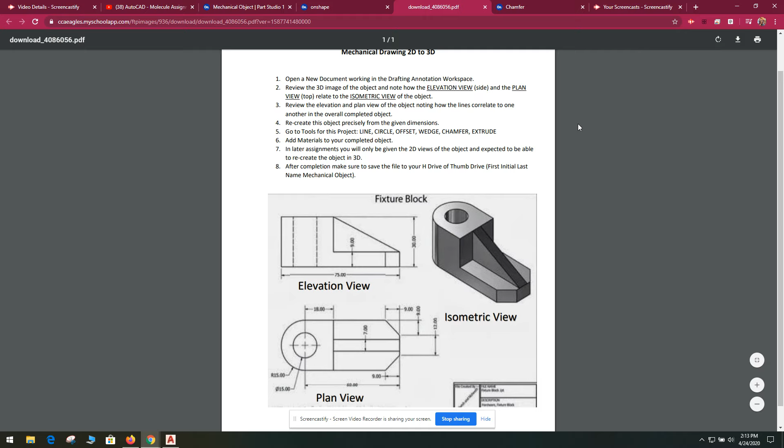Okay, in this video, I'm going to show you how to do this mechanical drawing in OnShape. It's a little different, you just have to change the way you function in this software, but you can still create it. So just take your time, and think through things.

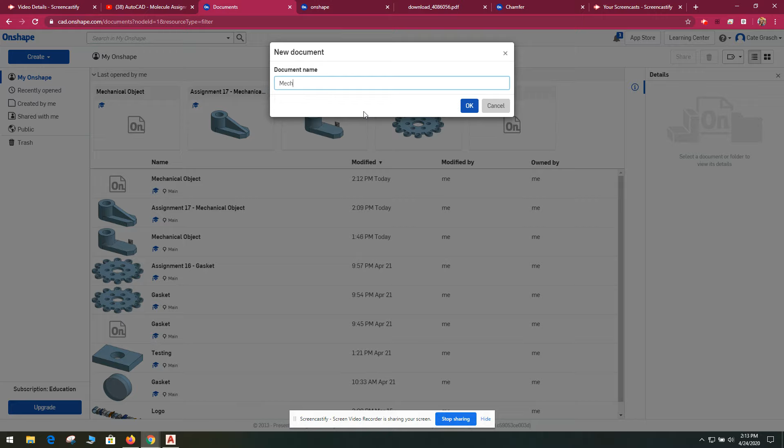So I'm going to go to OnShape and start a new document, just like we've done before. Create document, we're going to name it mechanical object, and yours is going to have your first and last name as well. You'll get the workspace screen.

You have all your planes visible. Go ahead and turn off your front and right plane to make it easy, and view it from the top using your view cube. Scroll back out because what they're giving you is pretty small, and we're going to want to start with our rectangular footprint. So sketch, select top, and now you can choose rectangle.

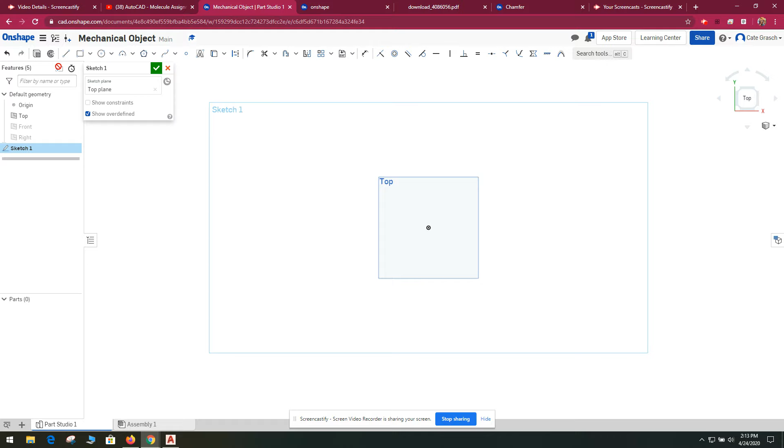Again, it doesn't matter the size you make it because you're going to come up here in dimension and change it. Once you've done that, you need this one to be 60, and it's going to be a lot bigger.

With this still selected, you're going to select this... select that and drag it out. That needs to be 30.

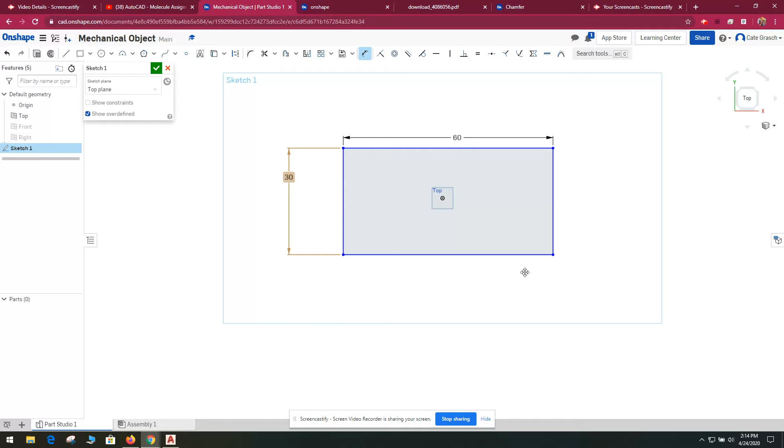Once you have this, we need to do our circles. You'll have one circle that you can go from this midpoint out and it should be 30. Then the next one, same midpoint, and you're going to have to actually dimension it because you don't have the option of snapping. So now you have your two circles.

You can go ahead and use your trim tool here to trim out these unnecessary points. So once you do that...

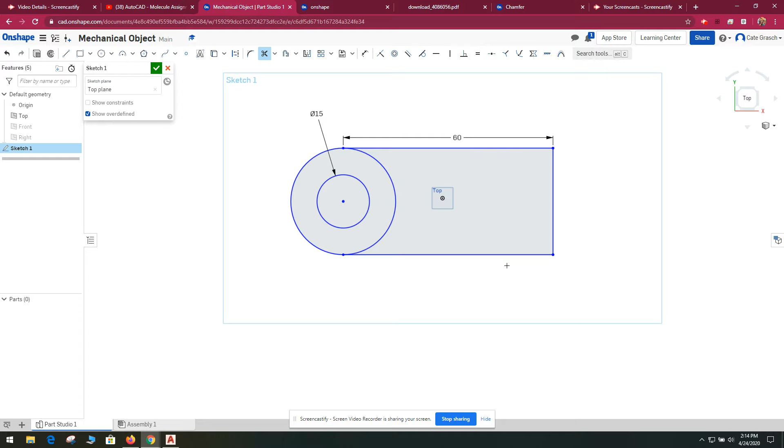You are going to do an extrude, but you only want to extrude... oh right, this is different. So let's only use one piece of it, and we won't do that because we're going to have to redraw it now. Yay.

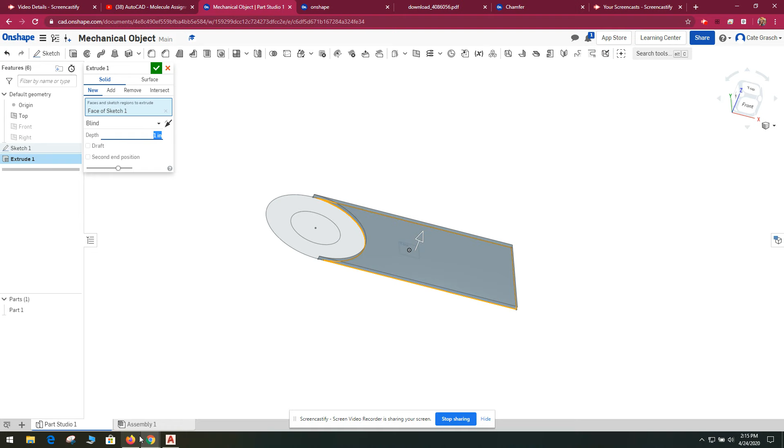We'll extrude these in pieces. This one needed to have a depth of 9. If you look at your drawing right here, this is your depth, you need it to be 9. Okay, whoops, not there. You're going to change it over here to 9.

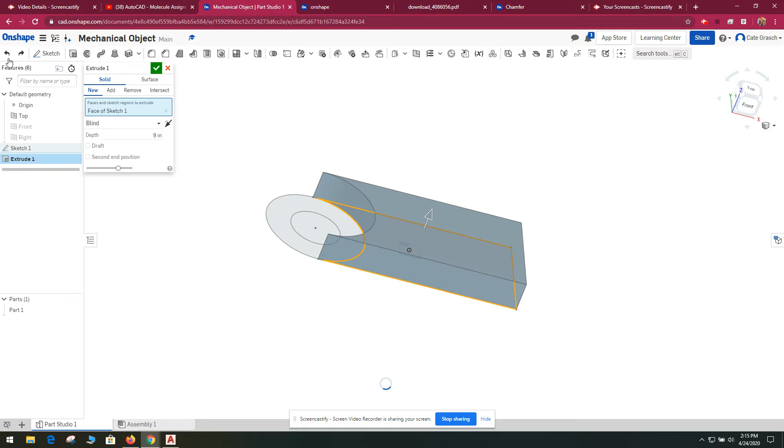So then we want to extrude that, but we don't want them to combine, and that's a problem that I've seen with OnShape compared to what we've done before. So we're going to step back, and we're going to say good to go.

So we're going to do a secondary sketch. Now the plane, you have to pick it. You want it on this plane, the top plane again. And we're going to do our circles.

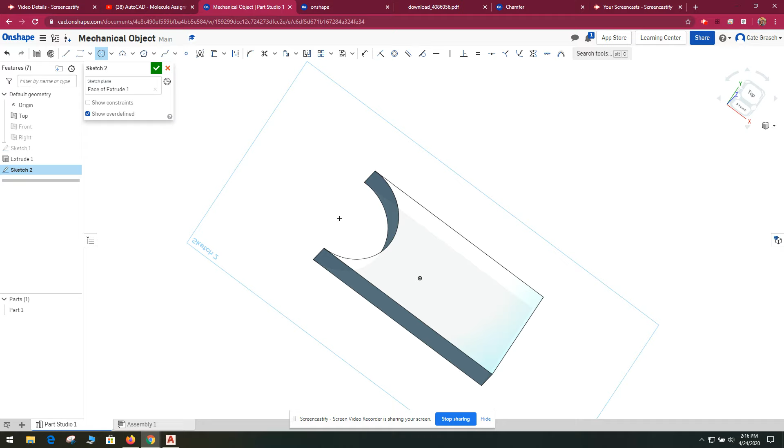So I made a mistake of doing my circles first, but you should still be able to get that midpoint. It didn't do what I wanted it to do, but that's okay because we're going to force it to do what we want it to do. This is going to be 30.

We're going to do a secondary circle, and it's going to be as big as we need it to be, and then we're going to dictate what it's going to be, which is going to be 15.

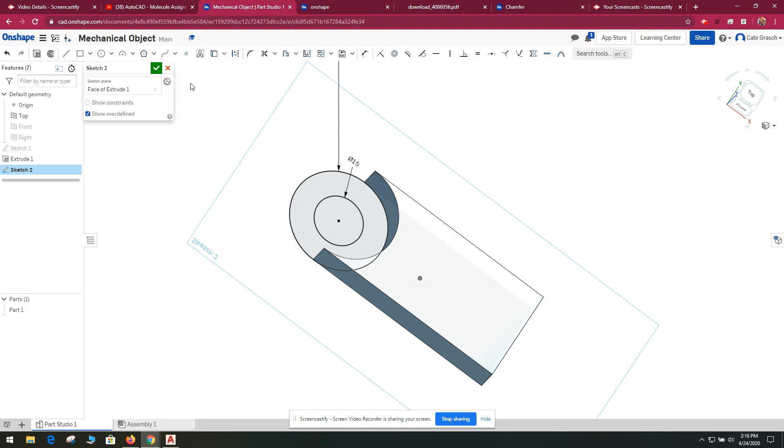Then you'll extrude this as a separate entity. Whoops, we want it to go up, so we want to change the arrow to up, and change the height. If you look back on your diagram, you want it to be 30. So you come back to Onshape, and over here in this menu box, press 30, and it should go up to 30.

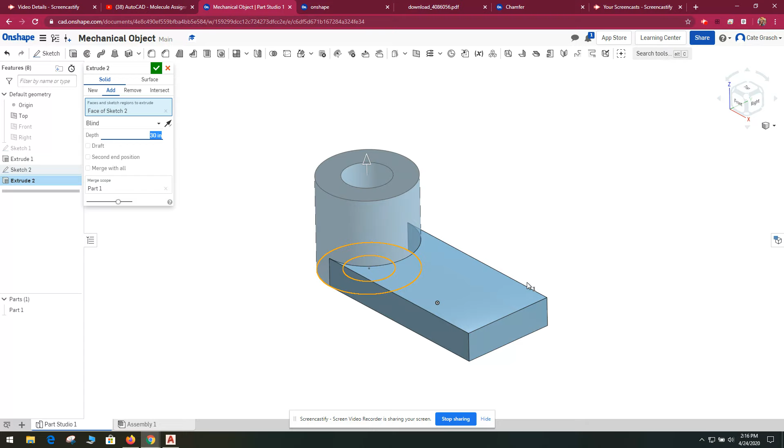At this stage, you should have a circle and this rectangle. So if we go back to sketch extrude, okay, what happened to... okay, if I go to this one, I want to...

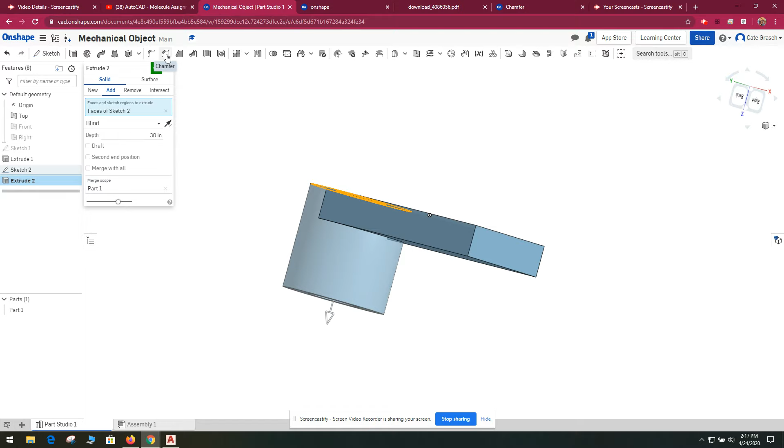I want to do a chamfer. Their chamfer tool will come up here, and it'll ask for the edge automatically. So we're going to click this edge. It automatically wants equidistant, so we're just going to type in 9 and enter.

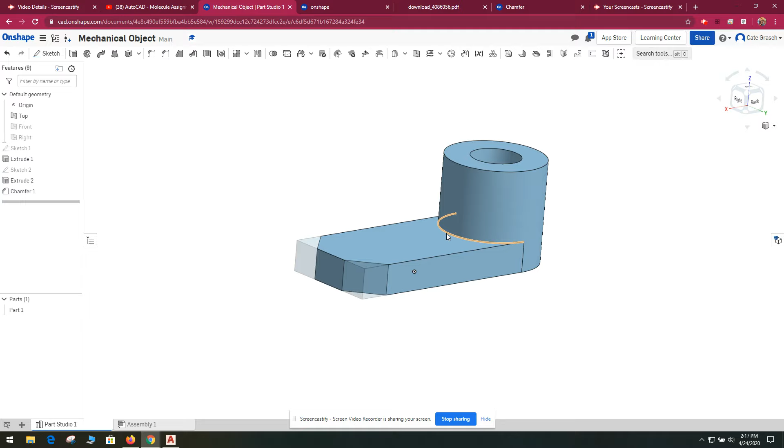Now we should be able to do the same thing over here. Click here, it's going to default to what we've already used, and that's what we want, and enter, and we're good. Okay, so now we have our base foot and our circle.

So we're going to do another extrude, but now we're going to make another sketch. This sketch is going to be on this face, and we're going to do a rectangle, from the center point.

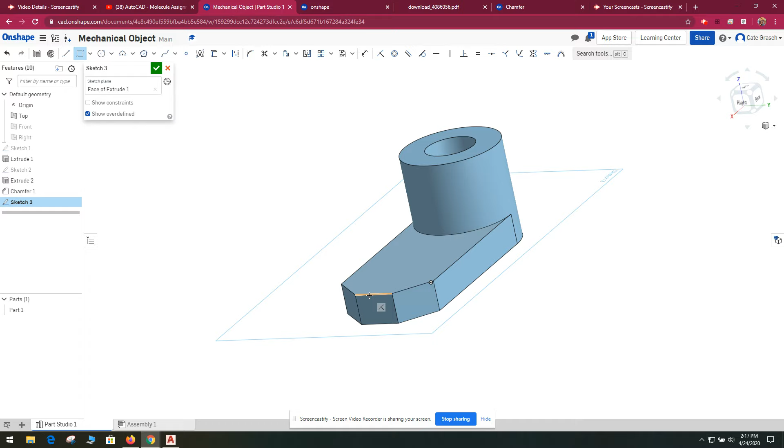It doesn't really matter because we are going to have to measure it anyway, or dimension it. So this side should be 42... but, or it should be 46.

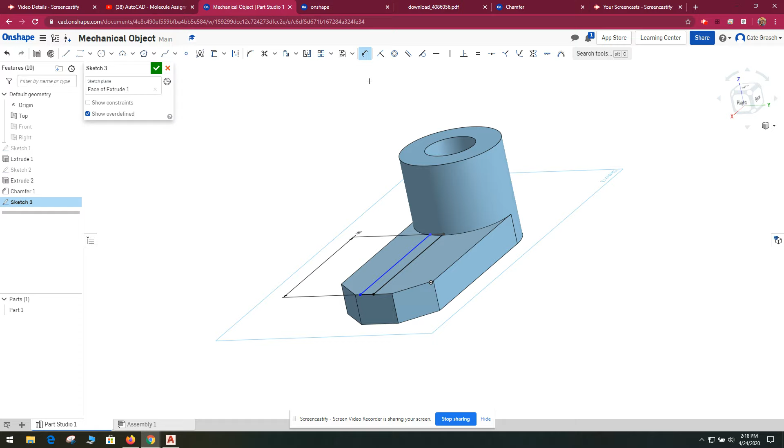And then if we dimension again, we'll come here... come on, you. Dimension, and it's this guy. And we want that to be 3.5. Whoops, not 35, 3.5.

And we're going to leave it. And then let's see if we can do it this way. If I make this 7. Okay, so we have that.

So now I want to do another drawing on this plane. Whoops, I let go of it. If you let go of it, it will not function the way you want it to.

So I'm going to make another rectangle, and I'm going to make sure this dimension is the same. And then I'm going to make sure this dimension is the same too, and 3.5. So now I have these two.

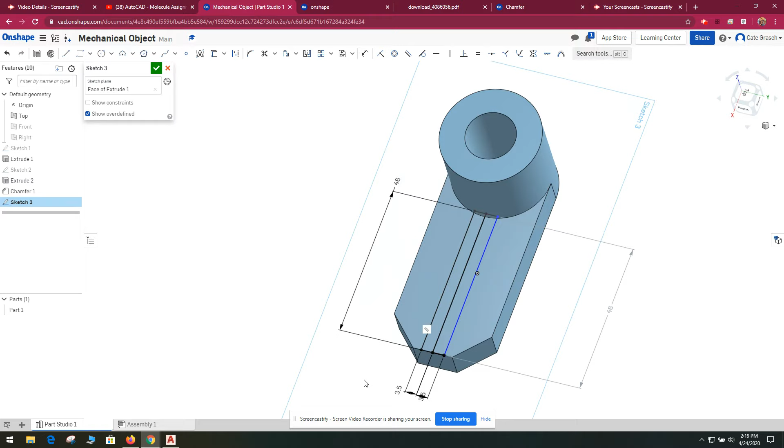And I'm going to extrude both of them together. See that, how they both went? And I want that depth to be the same height as this. Oops, no, I want both of them.

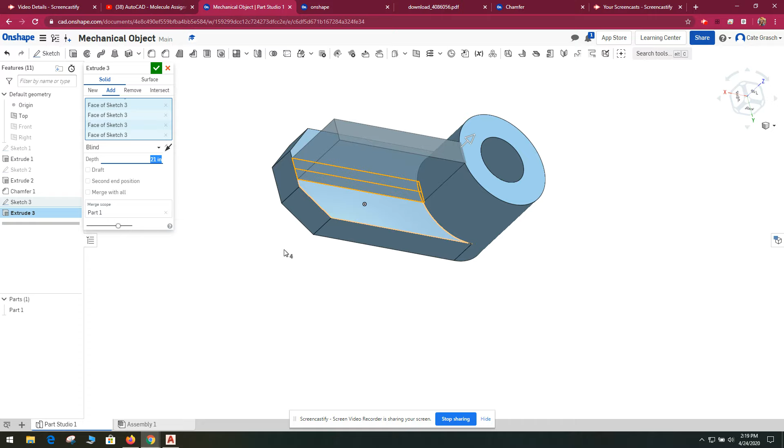And I want the depth to be 21. So it's going to give me this. And that's perfect, that's what we want.

So then I'm going to go to my chamfer, because I want this chamfered back. So I'm going to select this as my edge, and I don't want equidistant anymore, I want 2 different distances.

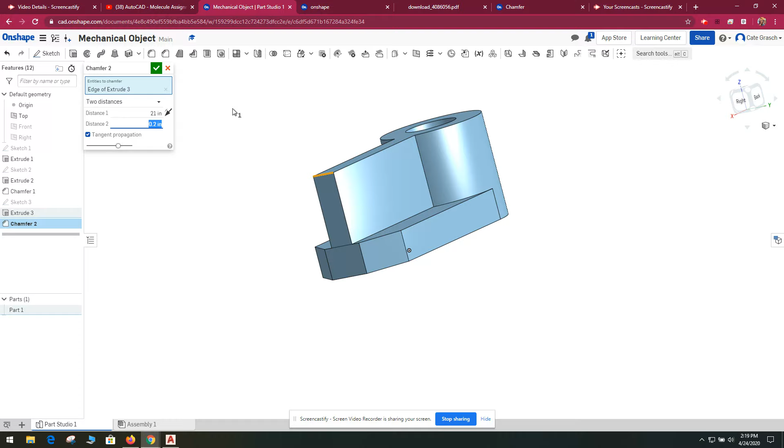So let's say we pick 21, which should be our height, and then we pick 45, which should be our angle back. And then check it out, make sure it looks good. It's a little different.

If I pick 45.5, it seems to flush in better. And so then I'm going to say, yep, I like it.

And then this is going to be our object, that you just recreated in Onshape.